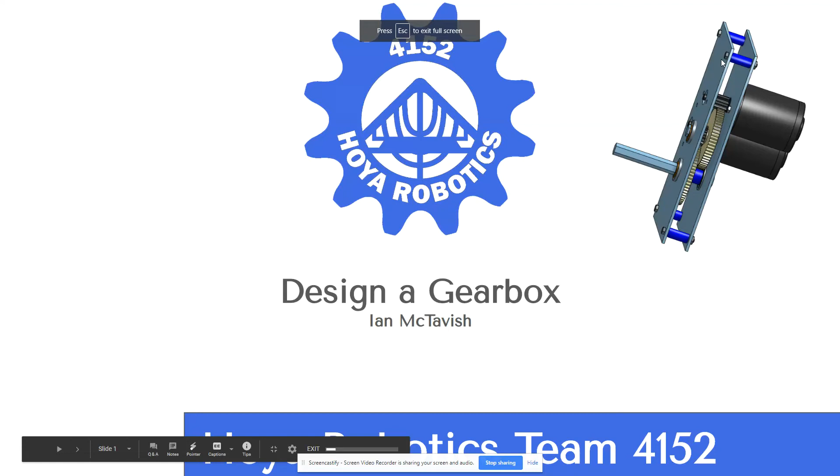And this is part 1 and 2 of designing a gearbox. So this tutorial is geared for Team 4152 new members, but hopefully anybody in the FIRST Robotics community can find use of it. This is going to be a series of tutorials. The goal for this one is to design a gearbox, and then later on we'll be designing tutorials on how to manufacture the gearbox so that all the different concepts for making complex robotic parts can be covered.

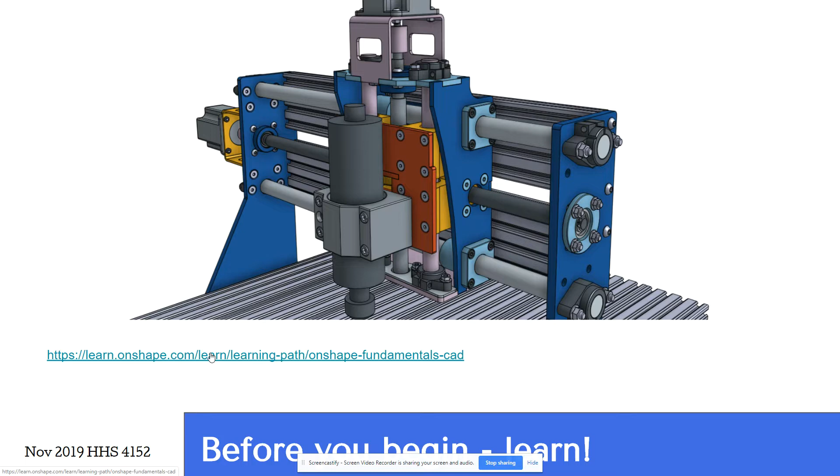The other key thing is that we are using Onshape, and you're going to get a lot more out of this tutorial if you've learned the basics of parametric design in CAD. And Onshape for FIRST Robotics has an education account that you can create, and there's a series of tutorials, and I highly recommend you work through all of those tutorials so that you're up to speed on these skills. Basically, you can create two-dimensional drawings, make those drawings into three-dimensional parts, and then assemble those three-dimensional parts into complex machinery.

Step 1, firstinspires.org. This is the website for FIRST Robotics, and I'm just going to quickly head to that website. Under the programs menu, they have FIRST Robotics competition, and there's a couple places to check. Number 1, they have a blog, and in the blog they do have usually a blog post where they announce what kind of motors you can use for the upcoming year.

And you can also go into the game and season information, and in there's all kinds of mechanical resources, and that kind of information is just crucial to be able to get your performance data for your different robots and for your motors and things like that. So this is an example of the 2017 motors that we had. Most of these motors we still use. For the 2020 season, there's a couple new ones that are really worth checking out.

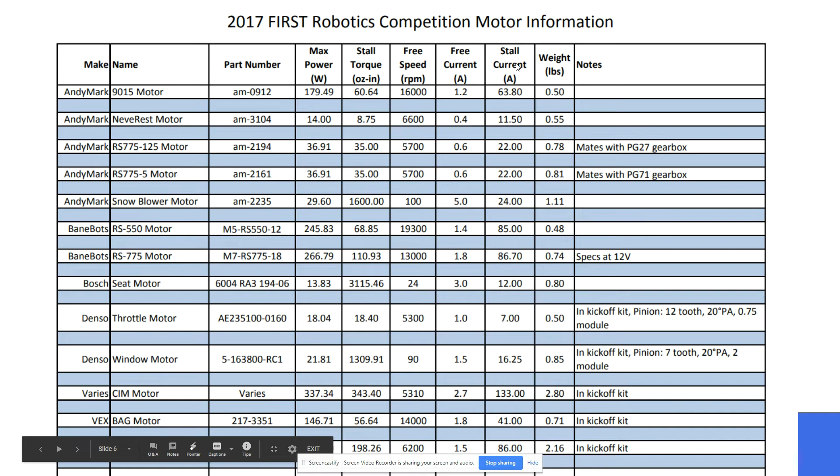But you can see in here you have all the information, what maximum power it has, what stall torque. So stall torque is basically how many ounces per inch of force before the motor will just stop turning the shaft. The free speed, so this is if there's no load on the motor, how fast it will go. The free current, so obviously using up too much amperage could be an issue, so you can calculate that. What is the current when it's going to stall out? So something on a 40 amp circuit like a CIM motor is not likely to stall out because the 40 amp fuse will probably flip before it stalls. And then how much weight is the motor?

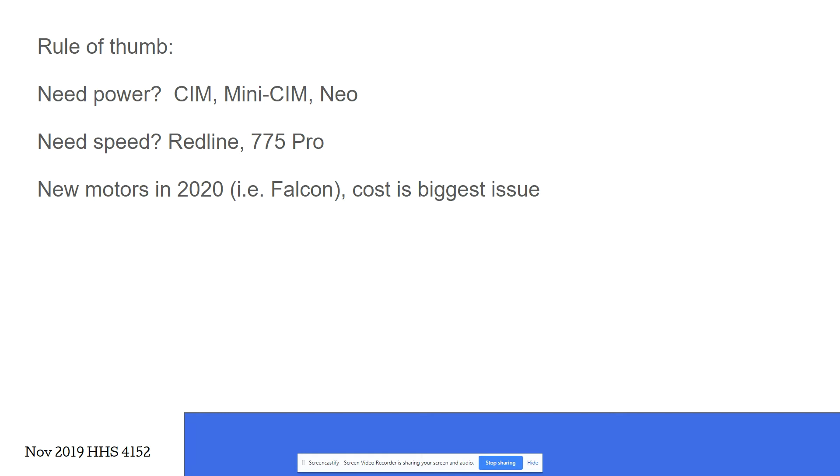Just a quick rule of thumb, if you are using motors in FIRST Robotics, for Team 4152, our go-tos are CIMs, Mini CIMs, and Neos, and those are great if we need a fairly powerful thing like an elevator that's going to lift a lot of weight or a drivetrain. And if you need speed, things like Redline motors or 775 Pro, really fast, great for shooters and things like that. We want to experiment with some of the new motors like the Falcon. Cost is our biggest issue, so we need to look at what motors we have. There's other motors like bag motors that we use for certain specific requirements.

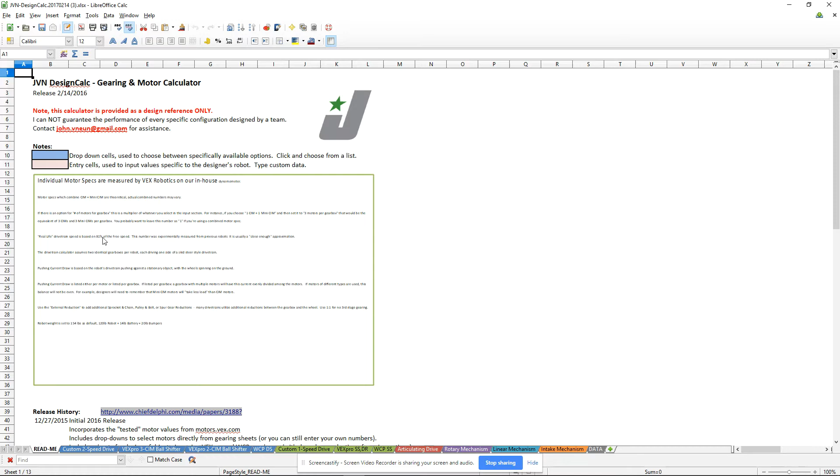Now, this is a really key thing, is that when you're designing a gearbox, you need to plan ahead. And there's a bunch of tools out there. One that we often use is the JVN design calculator. So this is the JVN design calculator. It's a spreadsheet. There's a lot of different tabs. Highly encourage you to read it, but basically you pick the tab based on what you're trying to do.

So if you had a linear mechanism like an elevator or something, you could fill it in. Anything blue is a drop down, so you can pick what type of motor. These white ones will automatically change based on the type of motor. The pink ones you can modify, so we decided 2 motors per gearbox.

Always kind of assume that the motor is not going to be running at 100% efficiency. If you have a linear mechanism, how far is it traveling? How heavy is the item that you're pulling? If there's a pulley, what's the pulley diameter? And then these are your gear ratios.

So these are the values that you play around with and enter in, and it will calculate what speed it's going to take to move that distance, and it will also calculate what the current draw is going to be. Now, the biggest thing is that we're on a 40 amp circuit, so we want it to be under 40.

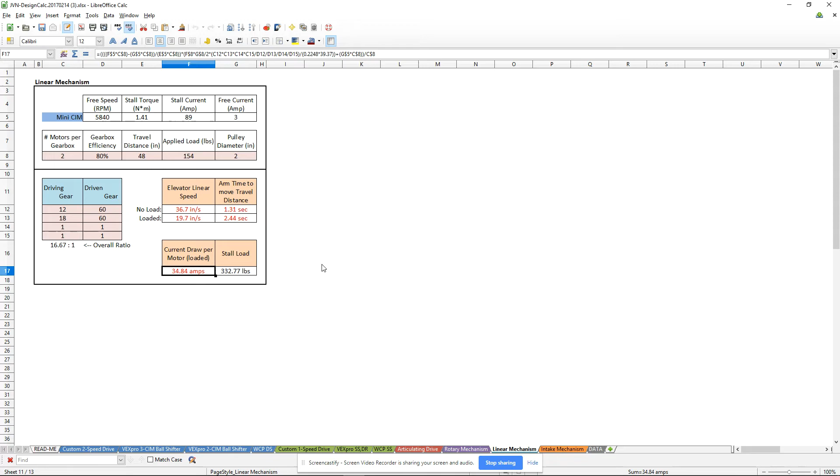This is getting pretty close to 40, so for this particular application, we might decide to add a third motor to spread it out a little bit more, or change the gearing to a more aggressive gearing, but the compromise is it'll be slower. So it's all about what compromise you're going to have.

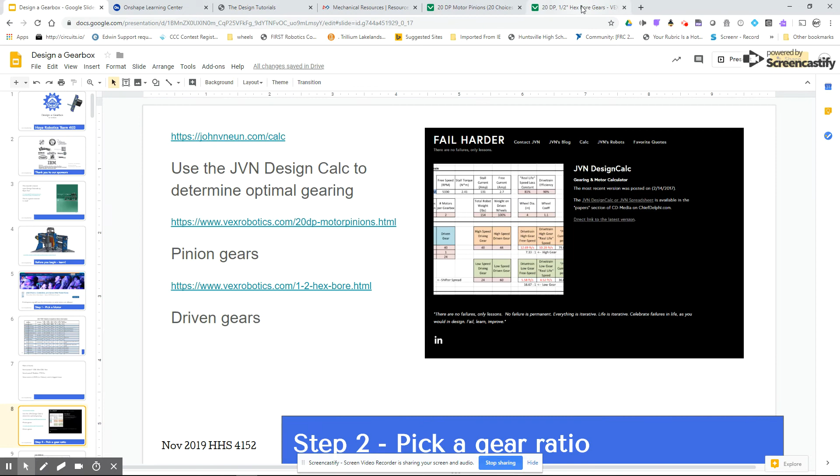The other thing is that you need to pick your gears. So we use Vex for a lot of our gears, and basically you need a pinion. So a pinion gear is something that will attach to the motor. So you can see here, CIMs are the same pinions as mini CIMs, so we can look through these and the number of teeth, what the material's made out of, what the DP, so the diametrical pitch. So those are all some of the key things that you need to use.

The other thing is down in here, you have your drawings and everything. So this is really key, because as you're picking information, you want to look through it and you want to decide, okay, if I'm going for this, I need to know what the pitch diameter is. So 0.6 for this one, because that's going to be used in your diagram. So you need to be able to find the drawing for the specific tooth or pinion that you're going to be using, so that you know that.

And same thing, so these are the driven gears. So with the driven gears, we typically use 1/2 inch hex bore, so that's why we go to that particular section, and we can see the different teeth. And same thing, they have drawings that we can take advantage of. So those are all part of the handy aspects.

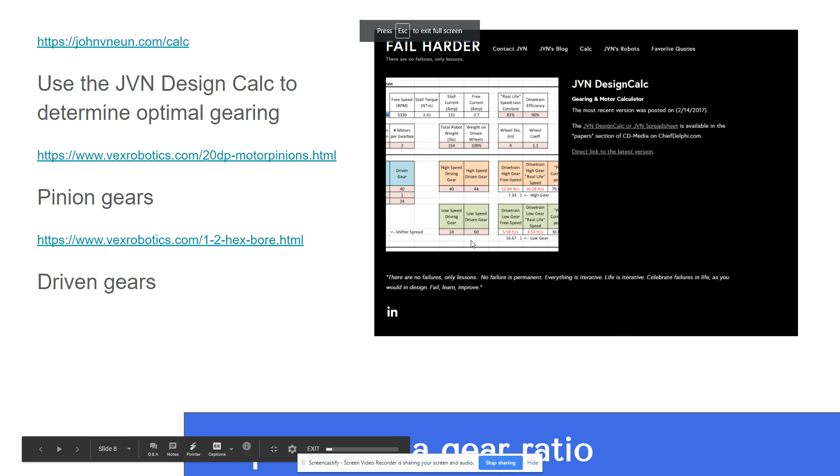And we decided in this particular thing that we were going to use a 12-tooth pinion driving a 60-tooth gear. The amperage for that was far too high, so we added a second stage where an 18-tooth pinion would drive a 60-tooth. So that gives us this ratio, and it works for our current draw.

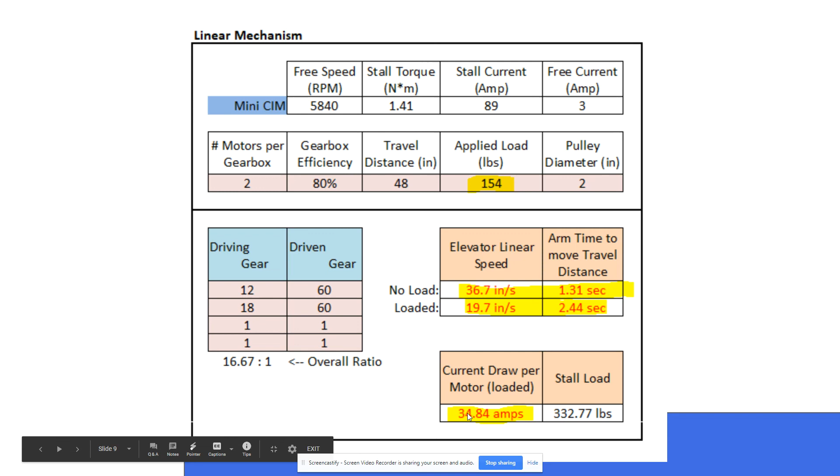So this is just a tutorial. Obviously we would modify this if we wanted to have a quicker speed, or if we wanted to reduce the current draw so that we're not encountering brownouts. As I mentioned on the drawing, you want to make sure you know the pitch diameter, and in VEX all of the dimensions are in inches, so you need to know that.

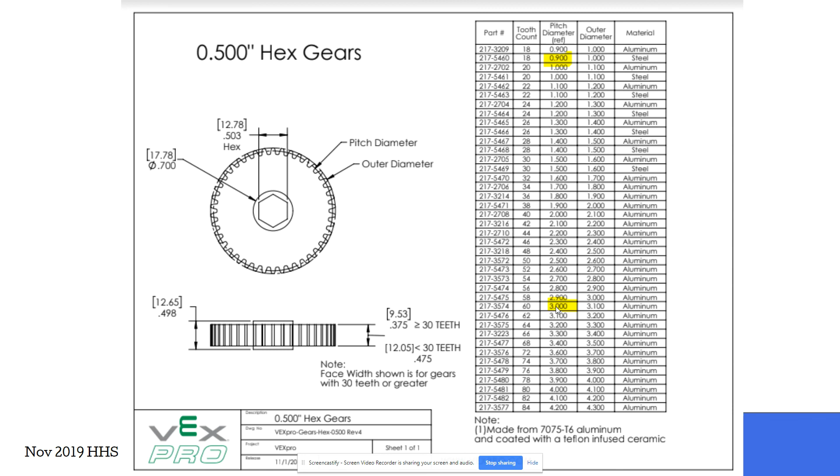And same thing, this is the 18-tooth gear. It's got a pitch diameter of 0.9, and our 60-tooth has got a pitch diameter of 3. So those are the gears that we're going to be doing in the tutorial, and in our next video we are going to be going over using Onshape to plan and work on our gearbox.